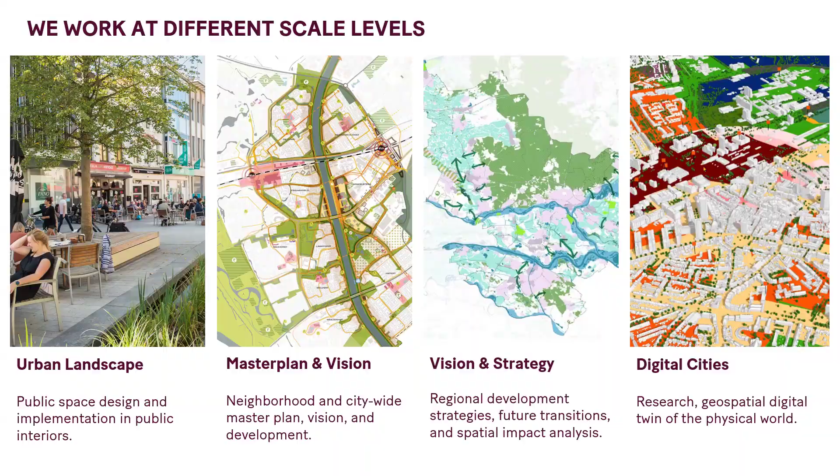On the topic of health, we have worked for more than 10 years. I, together with my colleague Mariana, started this 10 years ago. It was quite a journey. We first started reading articles to understand what the actual link is between health and the physical environment, in what ways the physical environment influences our well-being. Then we looked at healthcare data and overlapped it with spatial data to understand the patterns. And then we started working on projects at multiple scales, design and policy projects, informing how the urban environment should be shaped in order to provide healthy living.

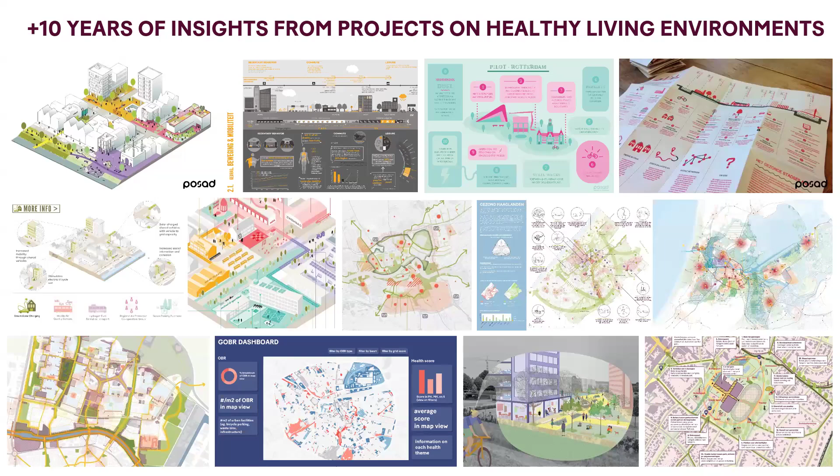So why do we start from health? We see that in the Netherlands, in the province of Zuid-Holland, which we have tracked for a decade, there's a decline in perceived health, and mental health is also deteriorating. There are, of course, a few neighborhoods as exceptions, but in general the trend is that not only in the cities but also in the rural areas, health is declining.

Through different research projects, we realized that it is in certain neighborhoods more severe than in others. Certain neighborhoods have a tendency to cluster in different health issues, people that experience physical or mental vulnerability, overweight, or loneliness.

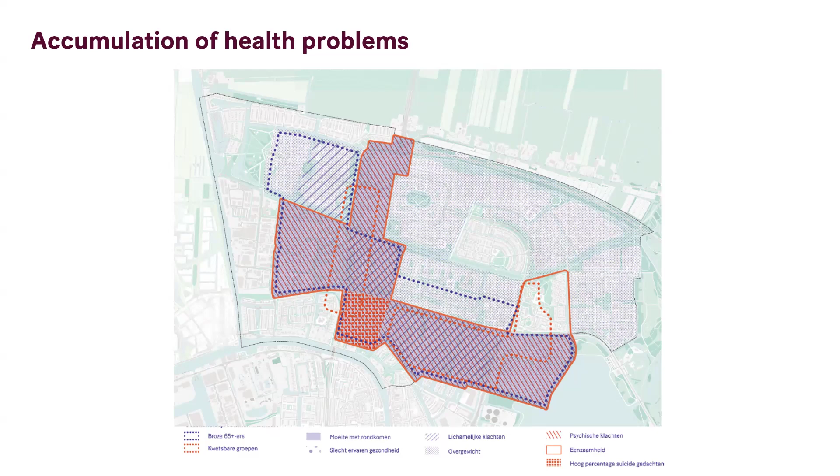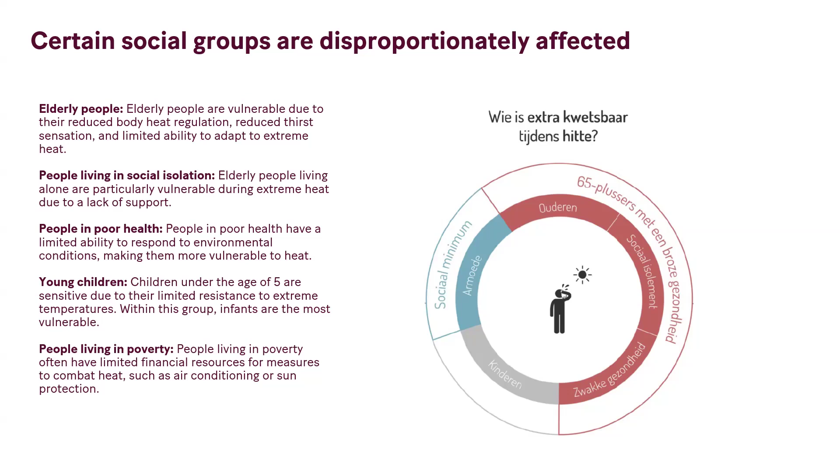We also know that certain social groups can be disproportionately affected by certain environmental effects, for example heat stress or heat island effect. Elderly people, lonely people, people with health conditions, young children up to the age of 5, and people living in poverty are disproportionately affected by it. That has to do with some of their reduced body heat regulation, reduced thirst sensation, or not having financial resources to adapt your living in that environment, apply certain measures, or lacking information and help at the right time.

This topic is also included in planning documents and planning law. Recently it has been changed, and in this Environmental Act that right now kind of encompasses all the different laws that used to guide the spatial developments before, it's now in one act. And there, health has a prominent role. It says that one of the objectives is to create a healthy living environment that also encourages healthy behavior and offers protection against negative environmental influences.

Authorities, both government but also companies, must take into account the precautionary principle. That means that if there's evidence or valid reason to believe that activities could have a negative impact on our health, they need to take action. So that urges these authorities to invest in prevention.

There are 6 instruments that support implementation of this Environmental Act, and they are on multiple scales. For example, visions are prepared by municipalities, by provinces, and by the state. The urban developments, urban designs are then translated into omgevingsplan, or environmental plan. And if somebody wants to build, then they need to get an environmental permit. These instruments help to look at the living environment integrally and include health perspective from the very beginning and let it play an important role.

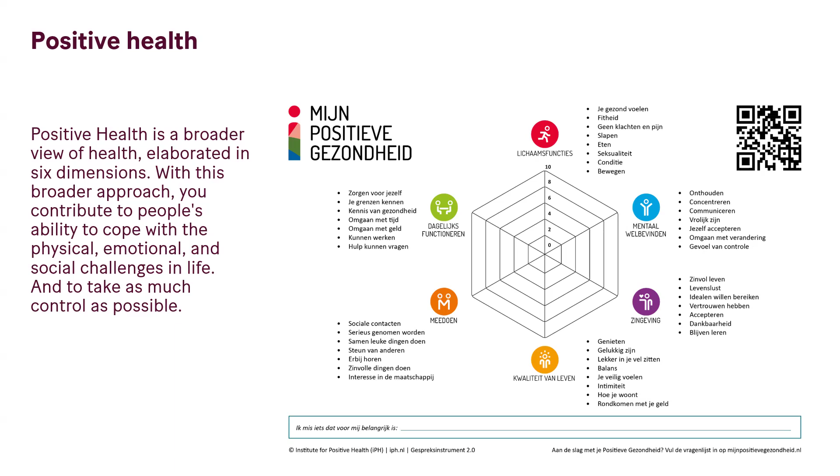Physical environment can influence our health in direct and indirect ways. Direct way would be providing us healthy air to breathe, healthy food, and indirect way through lifestyle. For example, do we have the opportunity to walk or cycle to our work? Do we have a place to exercise and meet each other? So these 2 components, the space and the lifestyle, is the core of focusing on prevention.

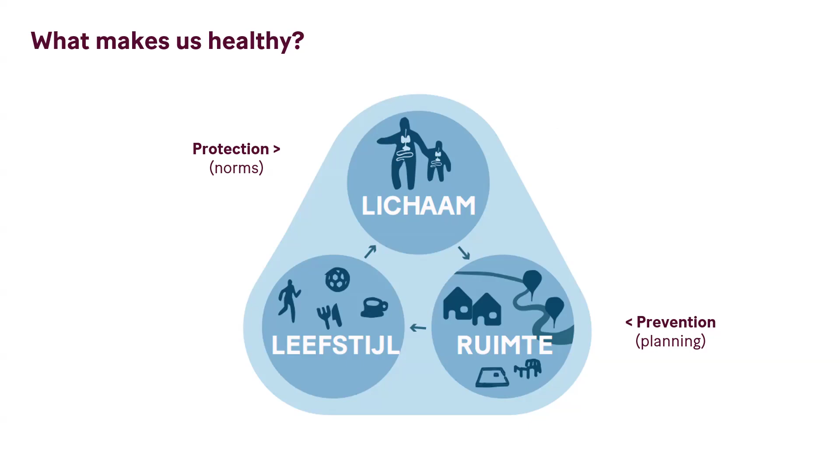Through different research projects, we bundled these principles that influence our well-being into 7 topics: sustainable and safe living and working environment, space for small and big, green and blue, active and inclusive traveling, diversity and proximity of functions, close-knit sustainable communities, and local food. I will guide you through these topics with examples.

So per topic, we define also subtopics, and per subtopic also specific measures that you can take and include in design. For example, for the topic sustainable, safe living and working environment, one of the subtopics is climate adaptive environment. And there are certain measures you can take on city and network scale, or neighborhood and street scale.

So to start your design, you could first look at the landscape where your design is placed, what type of soil there is, what type of water system, so that you can connect to it in the best way. Also, in the planning of neighborhoods, we take into consideration the heavy rainfall events that occur once in 250 years. In the Netherlands, that's a 90 millimeter buffer needed per every square meter of paved surface. And we try to design the neighborhood in such a way that vulnerable infrastructure or certain facilities could be accessible and functioning even during this rainfall event.

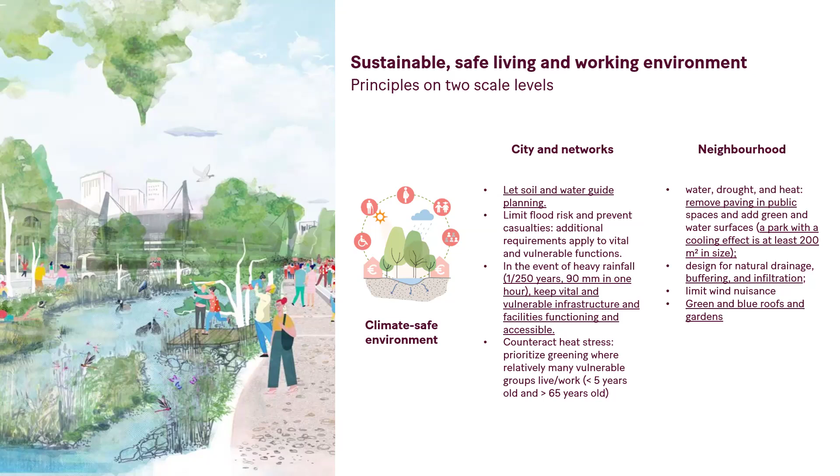For the topic of space for small and large green and blue areas, what's important is the presence of these places and good walking routes.

We look at the different scales of green and blue. It starts first of all at your doorstep. Then there's a neighborhood park of 2 hectares within 300 meters of walking, a city park within a 10-minute walk, and a landscape park within 2 kilometers from each home.

On the neighborhood level, you can think of applying the 3-30-300 rule: from every house you should be able to see 3 trees, 30% of the neighborhood should be covered by tree crowns, and within 300 meters there should be a cooling park.

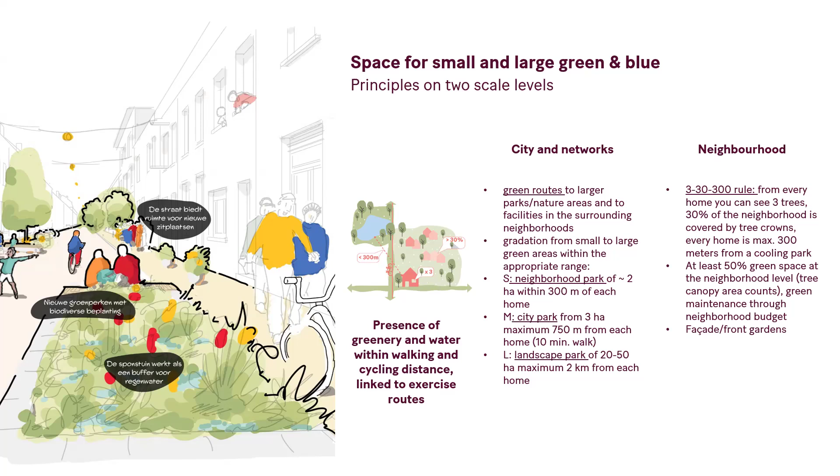When designing mobility networks, we usually look through an angle of priorities: first prioritizing pedestrians and cyclists, so slow traffic, then public transport, then shared mobility, and last, private cars.

On the city and network scale, it's important to design full, well-functioning, and attractive walking and cycling networks that connect the most important destinations, connect people to green areas outside the cities, and reduce infrastructure barriers as much as possible.

On the neighborhood scale, you can think of lowering speed to 30 kilometers per hour in residential areas, and in places where people meet and spend a lot of time, like sub-centers and city centers, introducing car-free or low-traffic zones to really give priority to pedestrians.

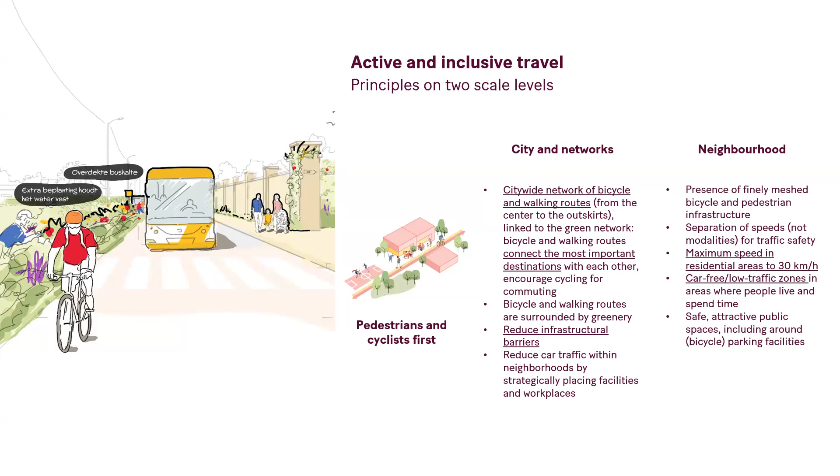For the topic of proximity to functions, you've probably heard of the concept of the 15-minute city. This requires creating mixed neighborhoods where living, working, healthy food and drink options, healthcare, education, and recreation are nearby within a 15-minute walking or cycling distance.

Some of these functions should be clustered to create sub-centers, with routes leading to them having active ground floors that make sure there's always attractiveness and social safety.

On the neighborhood scale, next to these clusters of amenities, you could think of giving more people the opportunity to benefit from it, by creating higher densities and designing compact, qualitative, and accessible public spaces for everyone.

Close-knit and sustainable communities: here the focus is on collaboration and ownership, and that starts actually in your apartment. Apartments could accommodate nowadays lifestyles, people searching for more collective forms of living with shared facilities. Also, inhabitants should be integrated into the design process through participation.

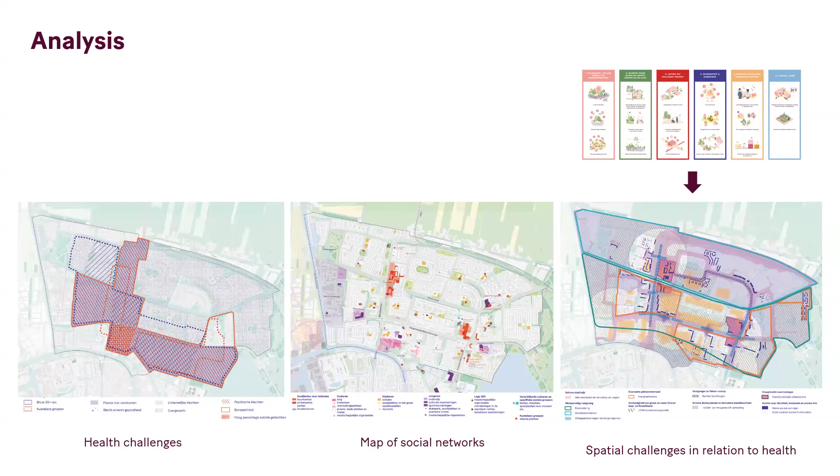These conclusions we then translated into interventions in the neighborhood per layer, starting with the green-blue infrastructure, then looking at energy, mobility, and voorzieningen - amenities - also using these principles to guide choices.

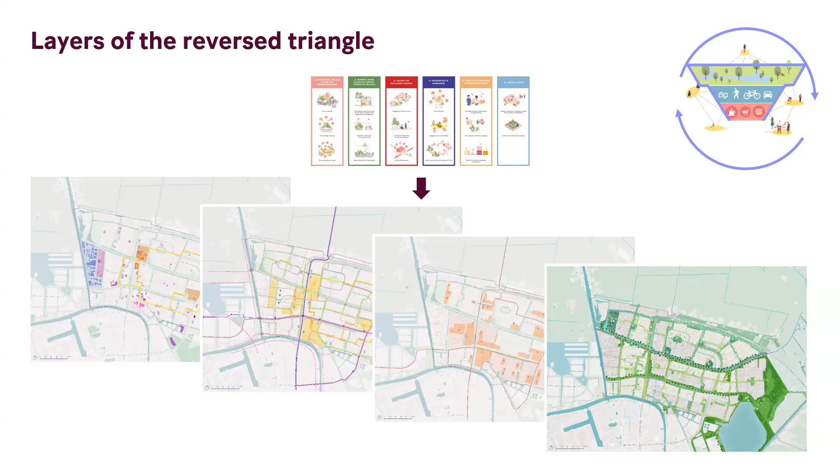As a last layer, we looked at housing. For us housing is not a quantitative assignment, but rather we looked at how through new homes we can improve the neighborhood. You may ask, how can it be done? By adding new program, we can also unlock other opportunities.

For example, here on the left you see a typical situation of a housing block with storages on the ground floor. It's right next to a neighborhood park, but it's close yet far, because you need to go around the building to access the park. So by transforming this ground floor, adding a new function, you create an active front to this park, create more social safety, provide interaction opportunities for neighbors, and add new homes in the existing neighborhood.

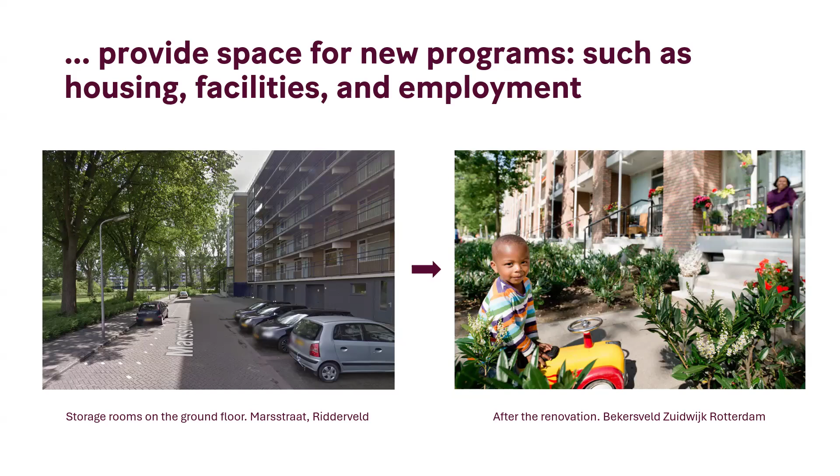In the neighborhood it's also very paved, and this pavement is partially caused by huge parking areas, which we see in the data cause a heat island effect, and also flooding during rainy months. So by reorganizing how we park cars, by stacking the cars and putting them in parking hubs, more space can be gained for more green trees and extra program in the neighborhood.

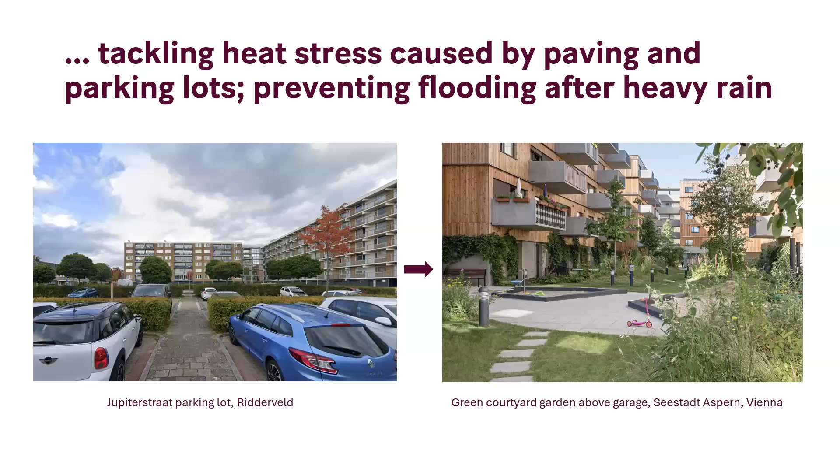We also see in Ridderveld, and it's a recurring issue across the whole country, that there are a lot of elderly people living in very big single-family homes, far from care. By building new homes in the neighborhood, better suitable homes for these people can be created, with care functions or informal care, where different social groups can care for each other, like seniors living together with young professionals. So the move from big single-family homes to more suitable homes can be facilitated, and these single-family homes can then be used by those who really need them - big families.

Also, what we see is that in residential neighborhoods we often find a monotonous typology - a single type of apartment.

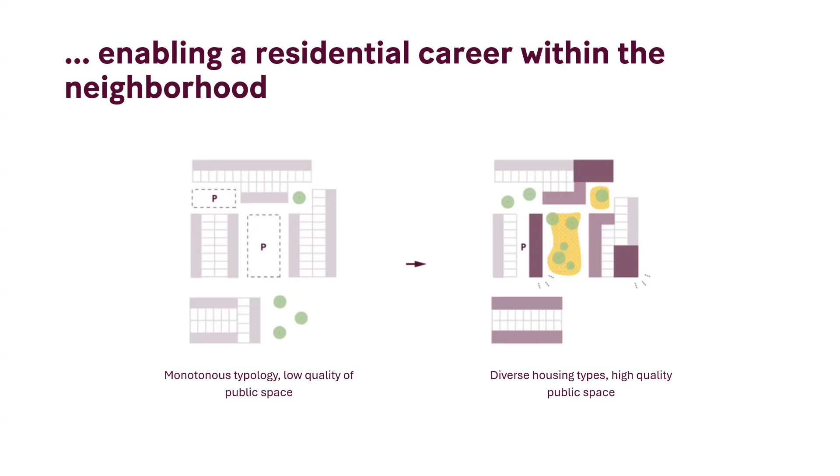If we transform these neighborhoods, we could also diversify the housing types, and that provides opportunity for people to do their residential career within the same neighborhood. Think of it: at first you live at your parents' home, then you move out to a small apartment, then you create a family and need a bigger apartment. If the neighborhoods are diverse, you could do this within your own neighborhood and keep your social network.

All these layers then come together into an integral spatial framework that fosters a healthy environment. This framework is then used to guide developments and initiatives in the neighborhood for the long term, up to 2040, 2050, and past that.

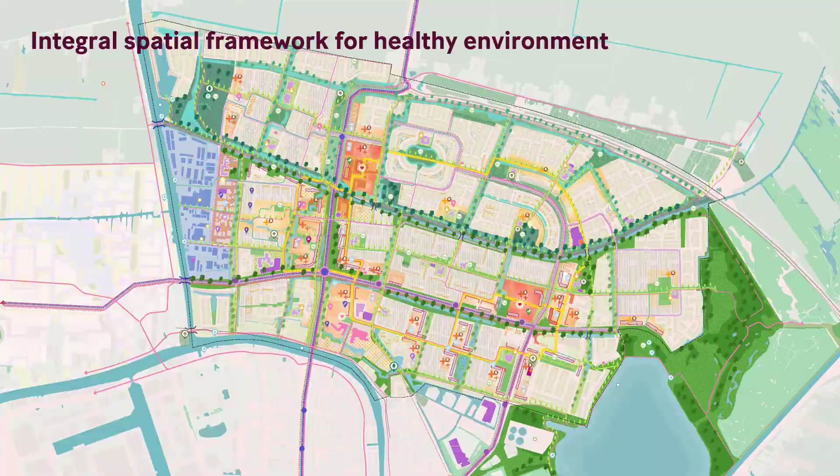There are certain lessons learned from this project. We see that this approach leads to different housing locations. What you see here was a housing development planned right next to a heavy high-category road, for social housing and for elderly residents.

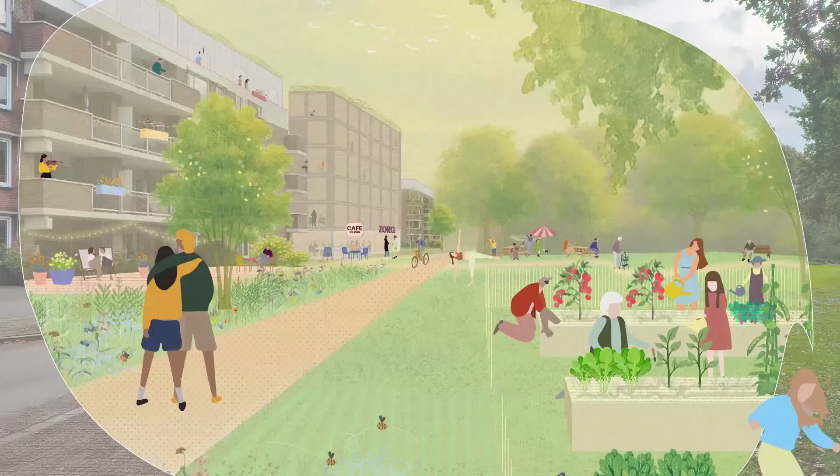So this is exactly the social group that would actually benefit from calm instead of being exposed to noise and air pollution. Looking with the eyes of a designer at this neighborhood, we found that there is actually space to add these homes right next to a park by adding, for example, one or two floors onto existing houses, or reorganizing parking.

Not only building these homes, but also looking at these projects integrally and redesigning the public space so that it is better connected to these buildings, and so that there are places where people can meet and do activities together.

This neighborhood in the municipality was seen as complete and finished, but to their surprise, 3,500 to 4,100 new homes can actually be added, which is around 20% of the existing housing stock in this neighborhood.

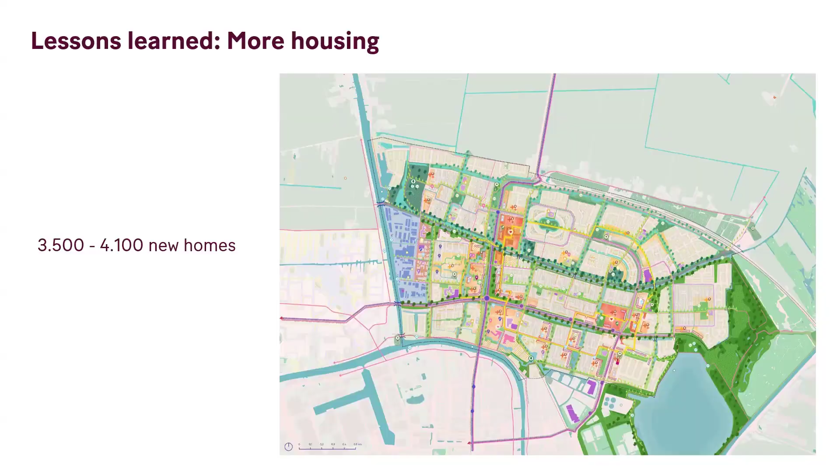This approach also helps to tackle multiple issues at once, linking social, health, and spatial aspects. For example, here you see a photo of a place. On the right there's a social housing building with a low energy class. People there have high energy costs, but because they cannot pay for these costs, they tend to reduce the heating, which has a negative effect on their immune system - a vicious circle. The immediate environment around these apartment blocks is also not inviting for people to spend time there, and certain functions such as healthcare and cultural community functions are missing.

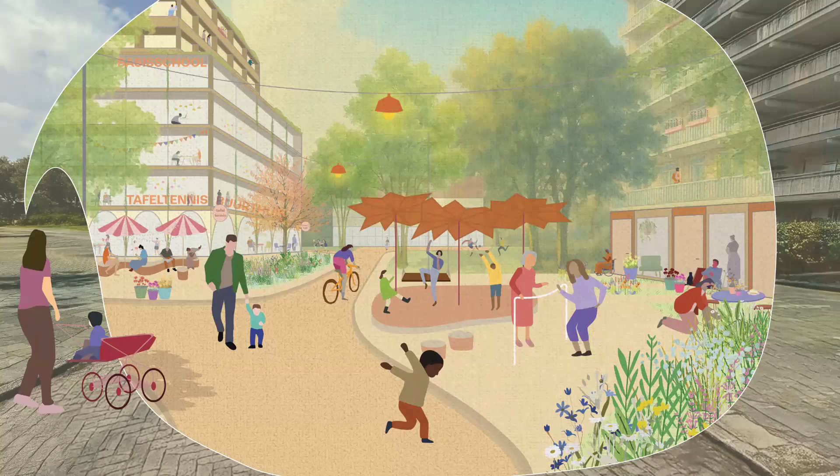Redesigning this space and redeveloping this neighborhood integrally, existing homes can be renovated, and renovation can be partially funded by new homes added on the ground floor, for example. The public space could be redesigned to facilitate slow traffic and meeting, play, and sports for different social groups.

In places with single-story buildings, plots can be intensified by adding missing functions such as community, cultural places, education, and healthcare. So densification doesn't have to come at the cost of green space - it actually just uses the existing paved surface and provides a different meaning for it.

The integral spatial framework can also be used to guide developments in the neighborhood. For example, here is a typical street, and there's a lot of sewage replacement work planned in this neighborhood. Usually you would just open the surface, replace the sewage, and then bring the same situation back.

However, if the plans are prepared, this could be used as an opportunity to redesign the street into an attractive walking route that leads to a cluster of amenities, renovating existing homes and using the ground floors to add new functions - in this case, a place for entrepreneurs.